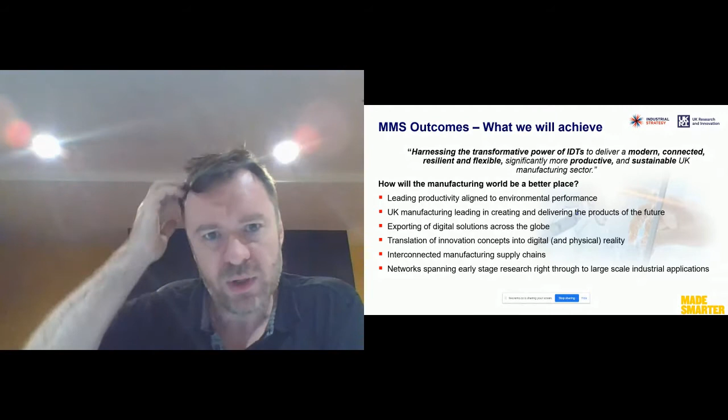A lot of those aspects will be aligned to the innovation themes that we talked about or mentioned at the start, and they'll be sponsored, designed and led with industry. There's a bias more towards being industry problem-led, really trying to solve those problems, but there is some funding available for opportunity-led stuff. I'll explain that in a second.

We have to create a set of measures, research centres, stuff for technology SMEs, innovation hub environments and so on that work for all, so we bring the best of everyone. That's technology users, large and small, from the SME through to the large multinationals. The technology developers exactly the same, from spin-outs and scale-up organizations all the way through to the large players, to create an environment that brings the best of all of those together to really take us forward, creating strong collaboration and networking across all aspects.

Good morning and welcome to my talk, Data-Informed Optimisation of Hierarchical Binder Jet Printing. So today I'm going to talk to you about a new additive manufacturing process that's been developed here at the University of Liverpool in the School of Engineering, and how machine learning might be able to optimise that process.

But before we do that, I'm going to talk to you a little bit about how we came to develop hierarchical binder jet printing, and some of the drawbacks of conventional binder jet printing, because some of you might not know what binder jet printing is, so I'll cover that. And then I'm going to talk to you about the hierarchical binder jet printing process, what it entails, and some of the benefits as a result of that process. And then I'm going to move on to some of the modelling work that we've been doing to try and improve the binders itself. And then I'd like to finish talking about how we might use machine learning to optimise the process further.

So hierarchical binder jet printing came out of an EPSRC grant that I was awarded back in July 2017. The proposal was called Reactive Metal Jet Fusion Printing then. This was a 3-year grant funded by EPSRC, and we're just about to come to the end of that - we've got a little bit more of an extension due to COVID. But back in October 2019, we spun out a company called Meta Additive, as a direct result of this EPSRC proposal. That company was founded by myself and my colleague, Professor Chris Sutcliffe, and the CEO of that company is Mr. Simon Scott.

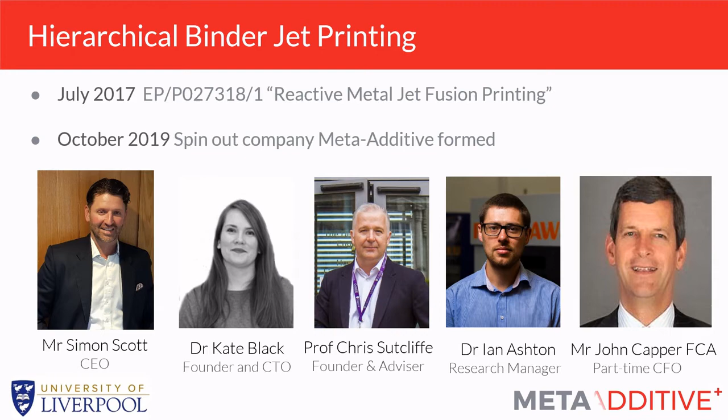So before we talk about what hierarchical binder jet printing is, I thought I would tell you what conventional binder jet printing is and what some of its drawbacks are. Binder jet printing's been around for many decades now, and it's a reasonably fast printing process, but there needs to be some lengthy post-processing steps, and that's what's limiting the uptake of this AM process further into things like automotive or aerospace.

It essentially relies on a powder bed, and that powder bed could be a metal, a ceramic or a polymer. In this instance, we're going to focus on metals. It relies on a powder bed where you spread out a layer of powder, which then has a sacrificial polymer that's inkjet printed onto that powder bed. And that's what binds that powder together.

But because we've bound it with a polymer, and we don't want polymers in our metal components, we need to debind. And that debind step can be quite lengthy, anything from 15 hours to a week sometimes, depending on the process and depending on the component.

That debind step often leaves carbon residue behind in your component, which is detrimental to the overall component and limits its applications. It's also a lengthy step, but also if your part is too large, you can't get enough binder out.

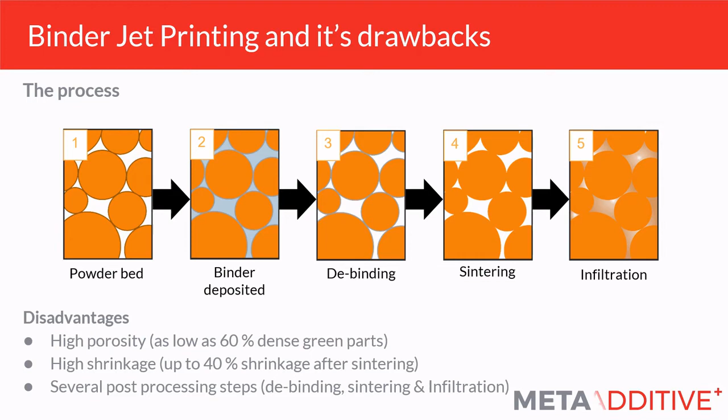So what we developed at Liverpool was we got rid of that sacrificial polymer, and instead of having a polymer, we used a binder that was functional. So it was made of functional material. And we call it hierarchical binder because it contains 3 components.

And the first is a liquid. It's a metal liquid, it's a metal organic. And when that is jetted onto the powder bed, it forms this conformal coating of a metal or ceramic, depending on what material you're using. And that film acts like a cling film and holds the powder together in its 3D structure.

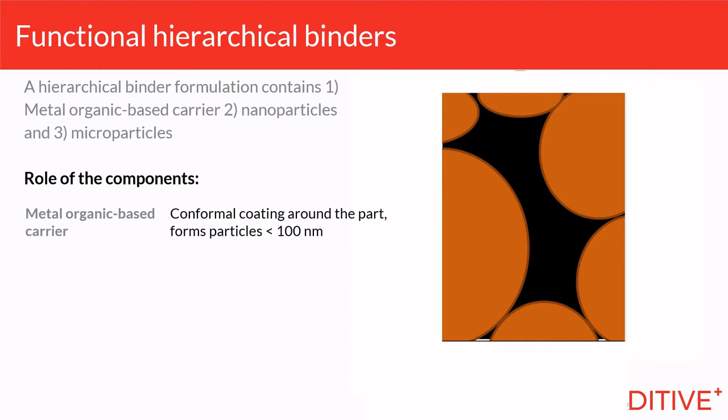And what's held in that solution, that metal solution, is some nanoparticles. And the nanoparticles, they help to fill in the gaps and the interstices of the powder bed, but they also help to lower the sintering temperature because of this high surface area. And then finally, we've got microparticles.

They fill in the remaining gaps, and they can be anywhere up to around 5 micrometers, depending on the size of your powder bed, depending on what size particles you can have in your binder. So we can see why it's hierarchical, because we've got molecular solution-based metal, we've then got the nanoparticle metal, and then we've got the microparticle metals, and they help to bind and also infiltrate the powder bed that you've got.

So what we see is we go from this conventional 5-step to this new 3-step. So it's reducing the amount of manufacturing steps and reducing the complexity of the process. So we still have the same powder bed, but instead of infiltrating with a sacrificial polymer, we infiltrate and bind simultaneously with build material, this hierarchical binder. And that limits the shrinkage, but also lowers the sintering temperature and the length of time that we need to heat treat.

So from our models that we've done to simulate this process, we've seen that for green part density, that's green part density, not final density, we can get infiltration of around 87% density. So that's very high. And as a result, because you're not removing any components from the powder bed, you're actually infiltrating it with build material, the printed parts we've got with the best shrinkage rates is around 2%. So that's a massive difference and a big improvement on conventional binder jet printing.

But I think the beauty here is the added benefit that because you've got build material from the inkjet head and you've got build material coming from your powder bed, we can start to print in one printer multi-materials, because that binder could be one material and the powder bed could be one material.

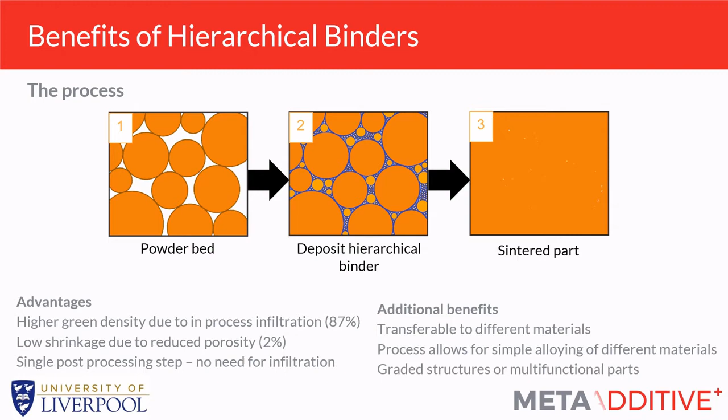And in the binder, the molecular bit could be one material, the nano could be another material, and the micro could be another material. And we could start to see how we might process some alloys or different materials, how we might be able to do printed graded structures. So we could have a head with one material in it, another head with another material, and you can start to see how we might build up much more complex materials in complex geometries in additive manufacturing for the first time.

Some other benefits here are the fact that we're infiltrating and binding simultaneously, which means we could just do a multiple deposition step. So we could print more binder, more infiltrate, and tune the densities that we need depending on what application we're using.

We also find that we get a much lower contamination of the final component, and that's because we're not using sacrificial binders, so we're not having to heat treat the binder out, which often leaves a carbon residue. So the contamination of the final part is much lower.

But really, I think the biggest benefit is this improved green part density and green part strength. Because you're infiltrating and binding simultaneously, the density and strength of the component as it comes out of the printer, before it's even had a heat treatment, is much higher than conventional binder jet.

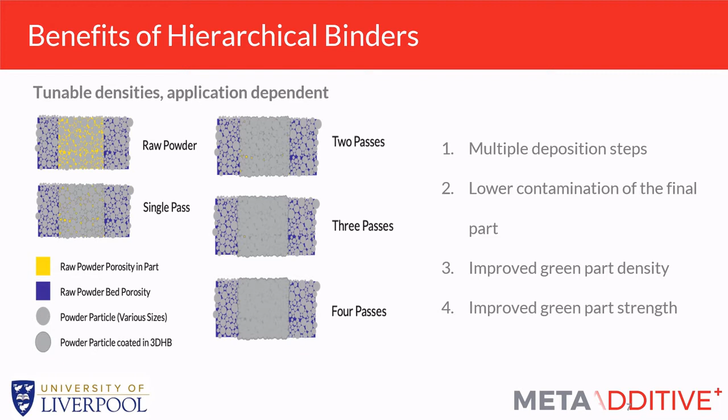That means we could perhaps print larger components, and components that don't need support structures, or as many support structures, because they've got that integral strength already. And if they don't need support structures, you don't need to remove them after, which removes a more complex, lengthy processing step. If we can remove processing steps, we can hopefully lower the cost at which we can produce metals by additive manufacturing.

We're also seeing that metal components conventionally used in additive manufacturing are produced by laser powder bed fusion, but if we can use binder jet printing instead, we can up the speeds at which we produce bespoke metal components. So we could start to see other sectors taking this process and producing bespoke components much faster and at lower cost than, say, laser powder bed fusion. That's because of removing all these processing steps, and the fact that it's not a laser-based process, but a print head process.

But the most fascinating, the most exciting for me, is where this technology could go. Because of that ability to do multi-materials, could we start producing components with embedded functionality? Maybe there's a printed strain gauge, or a sensor embedded in there. So it becomes really exciting thinking about where additive manufacturing might go, and what applications and sectors it might be applicable in.

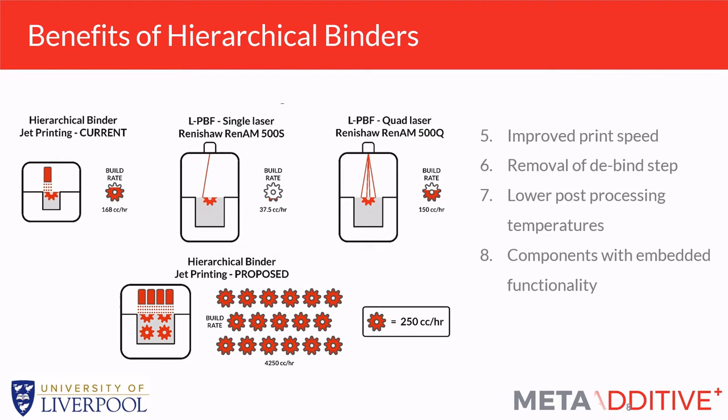But instead of doing lots of lengthy, time-consuming experiments, can we use some statistical modelling to optimise this process? That's what we've been doing recently, and we have a paper just published in the Journal of Additive Manufacturing. One of my postdocs has been using Monte Carlo simulations to model and predict the critical radius of the particles you need in your binder to be able to pass through the powder bed.

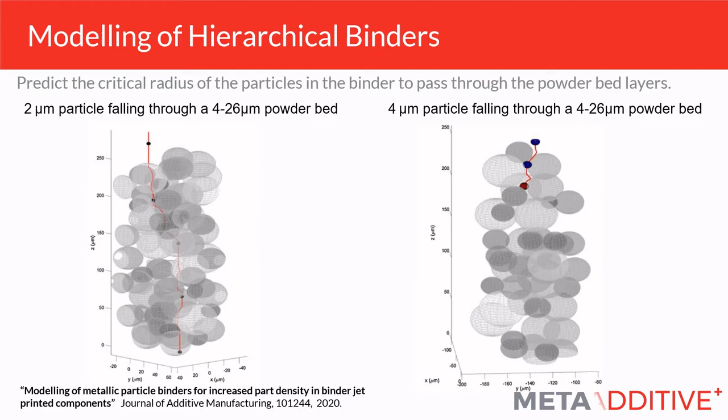What we see on the right-hand side here is a simulation of a powder bed, with a particle being dropped onto it. If the particle's too large, it will get blocked halfway down the layer of powder, which would be no good for us, and would have a detrimental effect on the overall porosity and density of the component. The left-hand side shows one that's at 2 microns in radius, which can percolate all the way through the powder bed. So it's really about whether we can use these mathematical models to predict the best size fraction and size range we need in our binders, so that they percolate and penetrate the powder bed uniformly and get the best density and shrinkage as a result.

These are some quick experiments we used to validate the mathematical model we developed. First, we determined from the model that the green part densities we can achieve are 87%. But it also shows that if our particles are too large, they'll just sit on top, as you can see here in A and C. You're seeing a droplet of binder onto a powder bed — this is a copper binder onto a titanium powder bed, so you can see the material difference. If the particles are too large, they just won't penetrate the powder bed and get stuck on top.

You can see from the bottom, B and D here, when the particles in the binder are smaller and lower than the critical radius of the powders in the powder bed, we start to penetrate through that powder bed, and that hopefully will give us an optimised density and lower this shrinkage rate that we see.

So from these models, we can then start to print some components, and here's a little video that we've got. This is putting a layer of powder on, and then we're using the inkjet head to jet this hierarchical binder to print some tensile test bars. There we go, so we've got 4 tensile test bars there.

So this model we can use to optimize the formulations for the binders, and then we do the characterization, we do the printing and then characterization. So what effect does the particles have on its overall density and the strength? And these are the things that we're using to optimize our process.

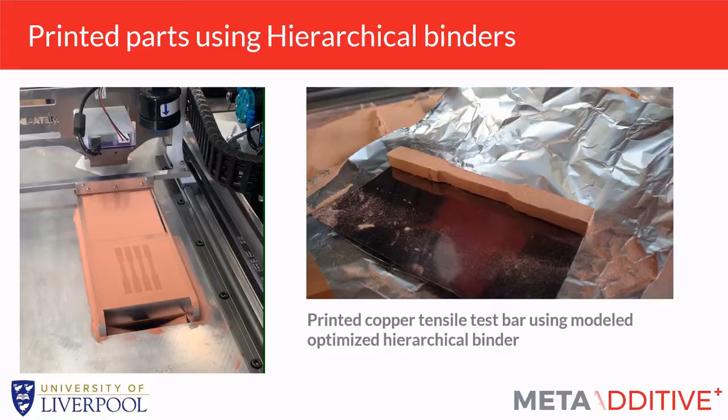These are some models that we've used, but what does machine learning hold for us? Can it be used to not just optimize the binders, but the whole printing process? This is something that I'd like to discuss with you all, hopefully in the next 10 minutes when we have our discussion section after the talk. Can we use machine learning algorithms to optimize the new printing process?

On the right hand side, this is one of our hierarchical binder jet printers that we developed at Liverpool and through Meta Additive. Why do we need machine learning? Well, this is a brand new printing process, so can we use it to speed up the optimization of the process, but also help to validate and adhere to standards, and also understand the printing process and its limitations?

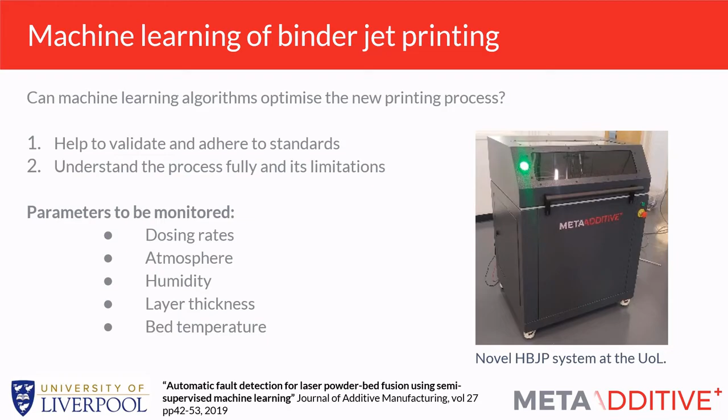We've done this. So with my colleague Peter Green, we've shown that we can use some semi-supervised machine learning to look at fault detection in laser powder bed fusion. So can we translate that into this new printing process? Some of the parameters we might monitor could be the dosing rate, atmosphere, the humidity in the printing chamber, the layer thickness, and the bed temperatures, and how that might affect the chemistries of the binders. This is something that we would like to look at next.

I'd like to discuss with you shortly about that. So we've seen that the hierarchical binder jet process offers lots of benefits, but can we use modelling and machine learning to really optimise this process further and speed up the optimisation process?

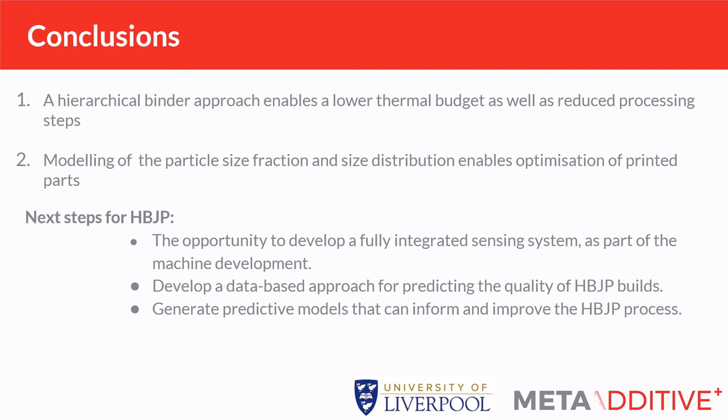So we've got an opportunity to get an integrated sensing system in there. We might be able to develop a data-based approach to predict the quality of the parts and generate these predictive models that can inform and improve the overall process.

So I'd just like to say thank you and acknowledge some of my co-workers here, some of my PhD students, and some of the companies that have been working with us on this project. So thank you for listening.

Okay, great. Thank you very much, Kate. That's fantastic. Are you there? Sorry about that, taking some time. Yeah.

So fantastic, so obviously it's quite a new technology. What do you see being the kind of main challenges or main barrier to adoption in the next, I don't know, say 5 years?

I think probably the materials side, we're going to have to demonstrate that they have as good, if not better, properties to existing AM components. I think if you can improve the speed, which I think we can with this technology, then it opens up more markets, more sectors that will take on additive manufacturing. So I think it just shows, because there's so much novelty to this, there's things that have never been done before, I think it shows really what machine learning and modelling could help us and speed that whole process up so that we can get it out there to end users.

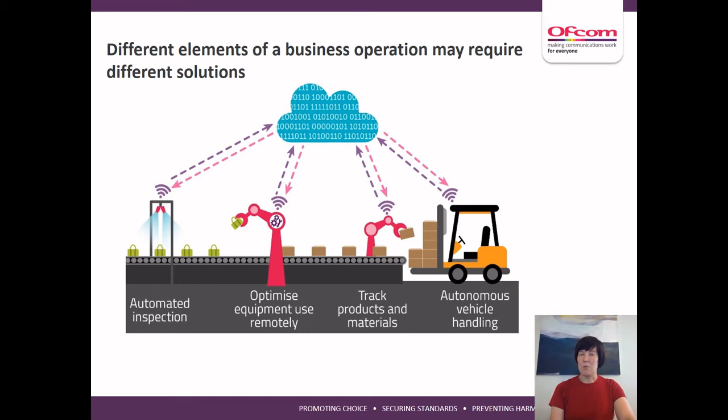Only once you are fully aware of all the requirements you have can you start to assess what's the right technology and the right business model for your case. And there's not just one list of requirements. This is an example of a production line - you might have four different steps, and each step might have different requirements and different capacity needs, or latency of that network. So you might have multiple solutions within your factory.

Now a bit about the technologies available. Mobile network technologies is quite often seen as what wireless connectivity is - the mobile technology. There's a lot of use of these, especially on the consumer side. They're usually public nationwide networks, but nowadays more and more private networks too, and I think in the future we'll see a real trend in MNOs, the mobile operators, creating private solutions for industrial settings. With 5G, there's also the possibility to have a slice of their public network - not fully private infrastructure, but private on a software level. The slice gives you control of your network.

Then the other category is local area network technologies, the most common being Wi-Fi. We're seeing more and more use of Wi-Fi in industrial settings, not just in enterprises or office environments with laptops, but also sensors and other industrial use cases. There's a new Wi-Fi standard coming, Wi-Fi 6, that will bring capabilities similar to 5G, and they're quite often seen as complementary with each other, really unlocking new use cases.